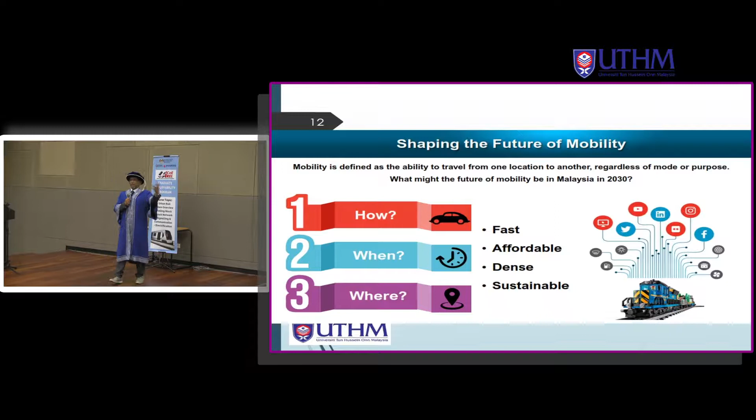When you travel, it's about the place from where we are to the destination where we want to be. What about time? Time is very precious. Back in the early days, time was not so precious, but nowadays it's getting more and more precious. You count by seconds, no more hours. Back in the 70s and 80s, if you watch a P. Ramlee movie, a one hour delay was normal. Now, no more.

In trains, we call it headway. Headway is when one train arrives, then it leaves, and then the other train arrives. So the time between the one that's leaving and the one that is coming, we call headway. Now, the common standard among urban rail systems is a headway of 90 seconds, which is 1.5 minutes - very fast. So if you miss a train, you don't have to worry much, because the next train will come in just a few minutes.

Okay, so you want it to be fast, in terms of time. You also want it to be affordable so that you can get the volume - as many people as possible to ride the train. We call it ridership.

Dense - not forgetting about comfort. We try to make MRT, mass rapid transit, so that hopefully in the years to come it will carry about 1,000 per trip - that's the mass. But right now it's not that many, because there isn't much service yet, and in terms of demography the stations are not that dense yet.

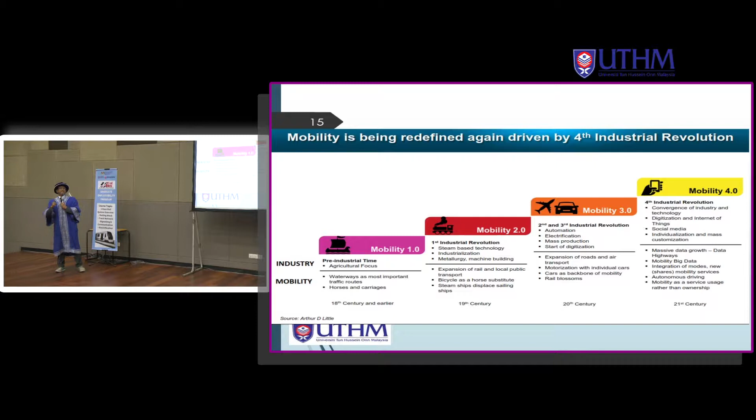What year was the first train in Malaysia, Tanah Melayu? What year was it? Anyone? Okay, I'll give you a clue: KTM celebrated 125 years - I think I have some KTM friends with me. The clue was KTM celebrated 125 years in the year 2010, so that means it began in 1885. Now that shows how old our railway industry is.

It began in 1885, but in Japan, okay, anyone? What year?

1873, just 12 years difference. And look where Japan is now in terms of railway. So we have to catch up, and this is the theme for this lecture. We need to be aware that we need to go fast, we need to be at par with the world global railway industry.

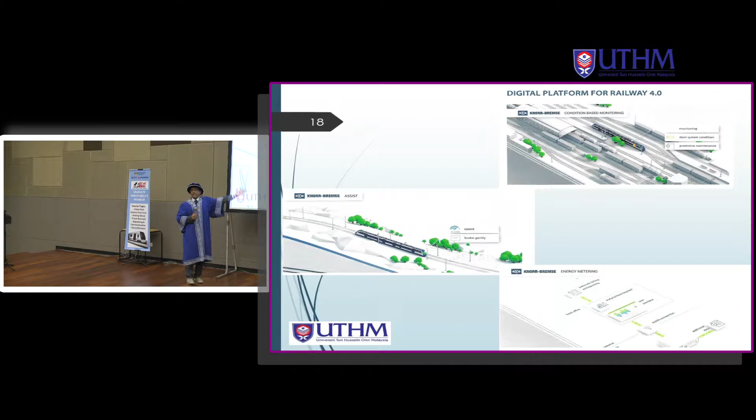Okay, these are some examples of digitization in railway in practice, and there are many, many companies in the world doing this. Number one, condition monitoring. We have sensors in many places, and those sensors give you data in real time, like speed control, brake systems, and so on. These are the platforms that make the train alive, organic.

Okay, next please. These are some of the smart operations I mentioned. In terms of operational efficiency, it optimizes the fleet's operational performance. When you talk about fleet, it's the train sets. So we manage those train sets to ensure the services are not interrupted.

So in Malaysia, in terms of operators, we have KTMB and Prasarana. Prasarana manages LRT, MRT, and monorail. KTMB manages the intercity, ETS, commuter services, and also some freight or cargo.

So this operational efficiency is about making those services work as efficient as possible. You know the best in terms of operation, no delay, which service in Malaysia? Name it. ERL, ETS, commuter, what? The best is ERL. The punctuality rate is almost 100%. And if you visit their depot, then only you know. And how do they manage? This is about operational efficiency, operator performance, and vehicle performance.

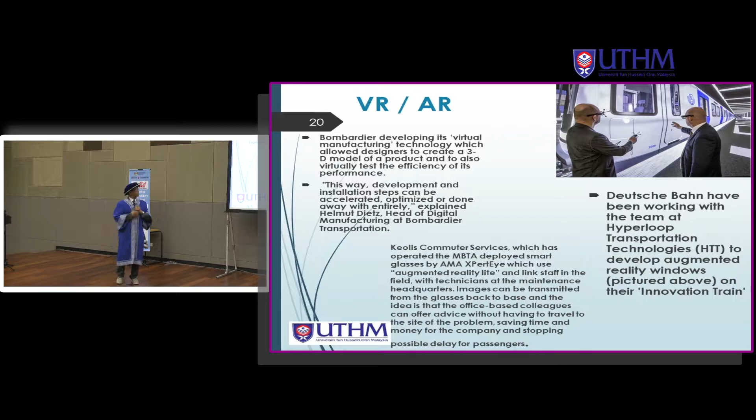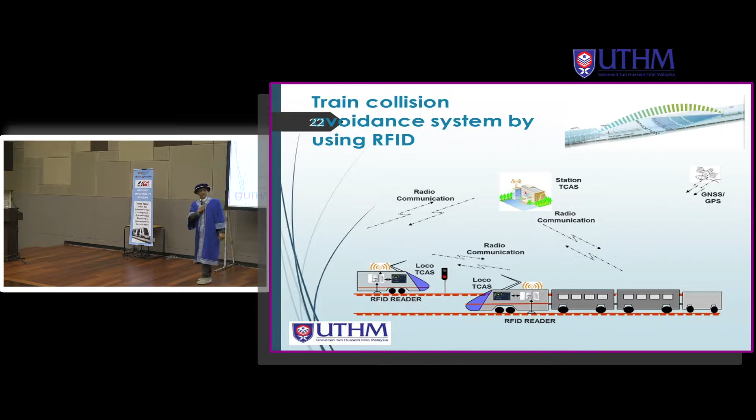Okay, the next topic is on energy. I'm going to have to rush a bit because there are a lot of things I want to discuss, but anyway this is about faster and greener. Historically, trains is considered dirty because of the soot, and because of the noise. So it spoils the environment, the shaking, the vibration. So all those are nuisance to the environment.

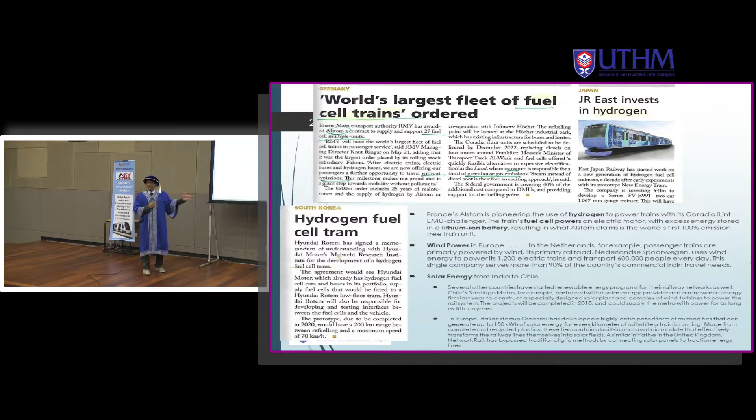Here are some clips about hydrogen fuel cells, wind power, solar energy, and so on. The wind power, you know, in Netherlands there are a lot of winds, so they are now using wind power for their LRT. The speed is enough for them to generate the energy. And some places where there are a lot of sun rays, so they use the solar.

Now what I'm going to show you is what the European railway were thinking back in 2012, 2013, and so on. This is where we need to look at them for us to plan the future. So you students here in railway, you have to bear in mind that you have to have this futuristic mind - what is the new technology that is already here, and what would be the next technology, so that when you go into the railway industry, you will be able to advise companies on what technology to really venture into.

Okay, next please. Play.

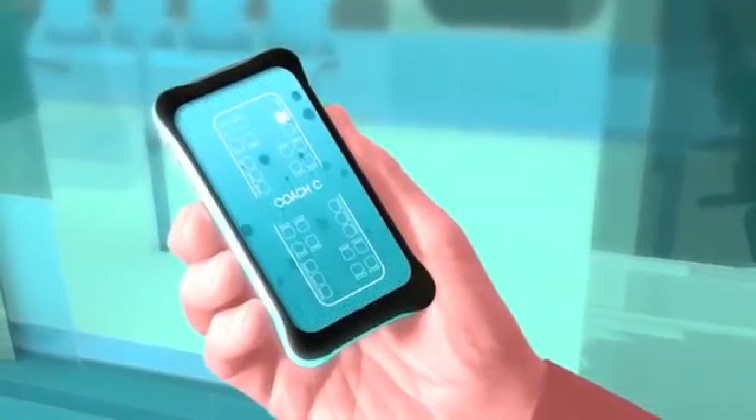Solutions developed in the Innovation Programme for cost-efficient high-capacity infrastructure will make European railways even more sustainable. Most of the network will be electrified, giving access to secure low-carbon energy. Trains using less power and causing less wear to the tracks will create an affordable and sustainable rail system. On the outer reaches of the network, energy storage systems will be used to power trains. These trains will reduce reliance on fossil fuels, charging intermittently at stations and overnight.

Technologies developed in the Freight Innovation Programme will see freight trains run smoothly through the network, providing EU industry with a reliable, efficient and competitive service. This is enabled by a control system that reconciles the different needs of passenger and freight trains by balancing demands on speed, capacity and energy. Freight trains travel unhindered at night because infrastructure maintenance is optimized. Improved rolling stock and infrastructure technology means significantly less vibration and noise, reducing the environmental impact of night running.

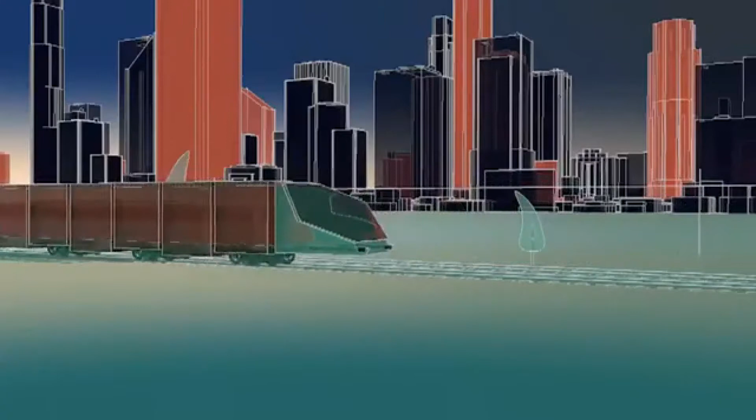Assets monitor themselves and each other. Sensors on trains send information on track condition back to data centers, leading to preventative maintenance.

To deliver this vision, we need to think about the railway as a complete system, and we need innovation throughout. With the dedicated long-term research and innovation support and investment of both the European Union and the rail industry, the technologies developed in Shift to Rail will meet customers' needs by delivering an affordable, safe and sustainable railway, which provides both high capacity and reliability, and which is accessible to all.

And with this joint undertaking, the rail industry can promote a culture of innovation, learn from other high-tech industries and roll out new technologies. The railway that emerges will be ready to cope with the demands of the 21st century and promote the worldwide competitiveness of EU industry in manufacturing and running the most sustainable transport mode.

How do you ensure you protect the environment? There are many factors, give me one. Low carbon.

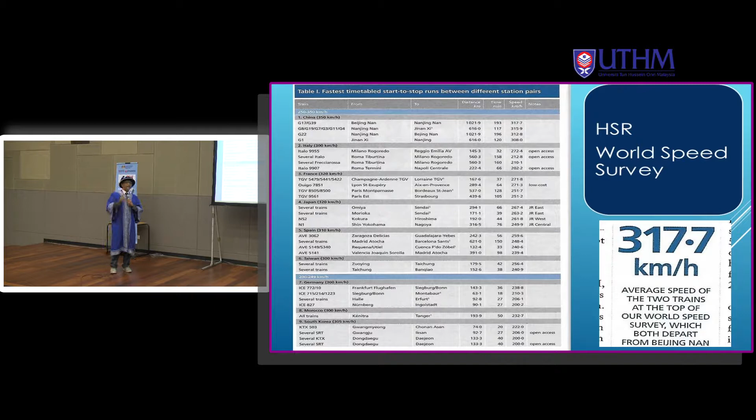So these are some of the figures about speed. Now, talking about kilometers is another thing. China, in 1990, had 0 high-speed line. Now, on average, this is the figure I got, from 1990 to 2015. The increment for high-speed rail, not normal rail, high-speed rail, per year on average for China is 2,200 kilometers per year increment. So that's why China is now the most populated country in terms of high-speed rail.

They imported the technology from Germany and elsewhere. After 10 years, they developed their own high-speed rail in terms of the rolling stock, the system, and so on and so forth. And in 2015, China had a factory making rolling stock in the United States of America, in Pennsylvania. So imagine how China has progressed.

Okay, now if you compare the speed there, this is average, not maximum speed. This is, if you look here, start to stop. What is start to stop? At the station, it starts and then the next stop - what would be the average speed? You can say from 0 to a certain speed and then 0 at the stop.

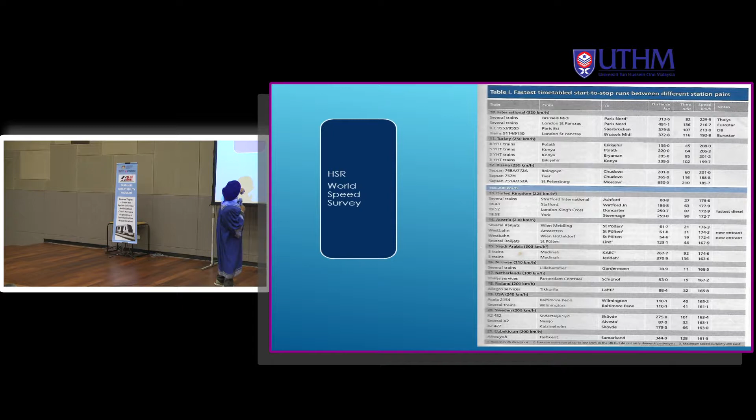Now, please go to the next slide. Now the next slide shows you, we continue the league. So you have Turkey, Russia, and below that is United Kingdom. So United Kingdom is not as fast as the other countries.

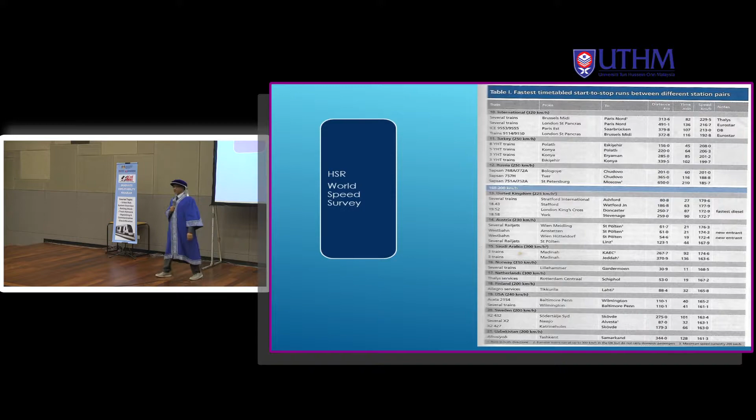So now that's why they are eagerly trying to have this high-speed rail in UK. Austria, Saudi Arabia, Norway, Netherlands, and so on and so forth, Uzbekistan, Malaysia, no way. So the highest speed for our nation is the ERL, 160 kilometers per hour, although it can go up to 180.

Okay, this is trains concerning the speed. Yes, please play.

Maximum speed of high-speed trains has been gradually increased in the past century, and the hunger for higher speed never stops as it's proven beneficial in improving people's productivity, lower carbon footprint, as well as smaller mortality rate compared to other modes of transportation. That's why maximum speed testing on new train prototypes is held occasionally. These are the 10 fastest train models in the world.

10th place, 300X. 300X, or Class 955, is the Shinkansen's trial model introduced in 1992. 6 total units were produced by 4 different vendors with little variation among them. In July 1996, Unit 6, the last unit, managed to clock 443 km per hour in test running, and became the Shinkansen's fastest train record, which still stands today.

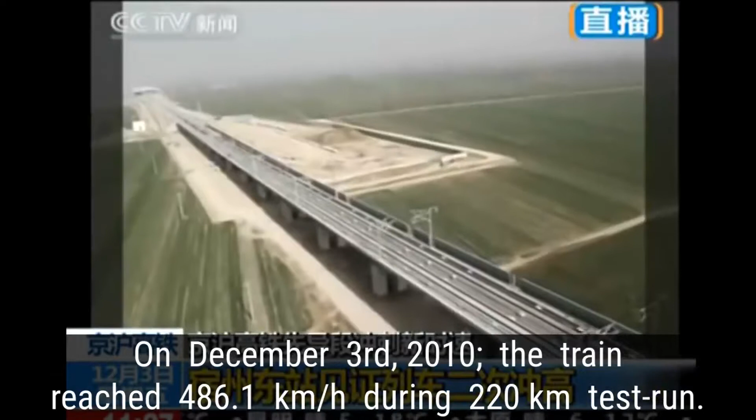7th place, CRH 380BL. Derived from Germany's Siemens Velaro, 100 units of CRH 380BL were built locally by China Northern Railways Company. During a subsequent test on January 10, 2011, these 16-car train sets broke China's own locomotive record with 487.3 km per hour - about 1.2 km per hour faster.

Sixth place, Transrapid SMT. The only commercial version of Transrapid train began its operation between Shanghai International Airport and Longyang Road Station with a travel distance of 30 kilometers. Albeit able to reach 501 kilometers per hour, the daily operating speed is capped at 431 kilometers per hour, which was already the fastest commercial speed during that time.

5th place, TGV Atlantic. TGV Atlantic is the second TGV model introduced by Alstom in 1989 for France's high-speed rail service. On a sunny day, 18th May, TGV Atlantic train set 325 cruised along the LGV Atlantic railway line at 515.3 km per hour. That was the fastest commercial train model on the planet.

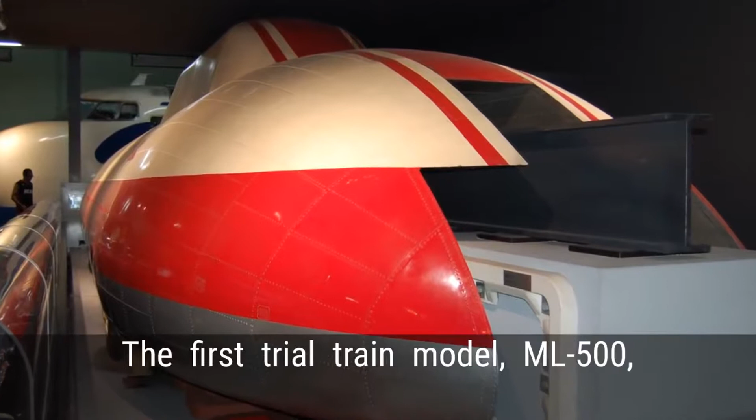4th place, ML500. Miyazaki Test Track was built at a length of 7 kilometers with monorail track upon opening in 1977, but changed to U-shape in late 1980. The first trial train model, ML500, was built specifically to become the first ever train to break the 500 km per hour speed mark.

3rd place, TGV Pos. A series of test runs called Operation V150 were conducted on the LGV East prior to its June 2007 opening, using a specially modified train. On April 3, 2007, a top speed of 574.8 km per hour was reached, making it the fastest wheeled train on the planet.

2nd place, MLX-01. Yamanashi Test Track is a 3rd generation track specifically for testing maglev trains at a length of 43 kilometers. Upon its completion, MLX-01 trains were introduced in 1997. From that day, continuous efforts were made by exercising serial test runs for years. In 2003, the train clocked 581 kilometers per hour, which was the fastest train ever during that time.

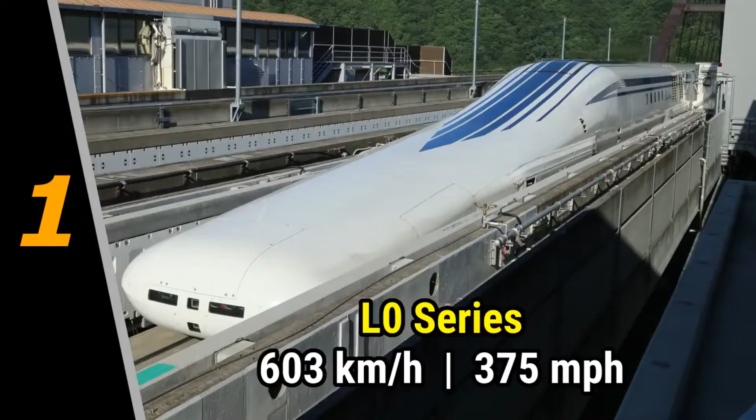1st place, L0 Series. When the MLX-01 service was terminated in 2011, JR Central, the body which governs Japan's research in maglev trains, introduced a new generation train model called the L0 series. The L0 series was shown to the public in November 2012. On April 21st, 2015, a 7-car train set a new land speed record for rail vehicles at 603 km per hour. It is the only rail vehicle to ever surpass the 600 speed mark.

Okay, this is about speed. Now people are comparing high speed. So what about us? Do we need high speed? Okay, so there was some, yes, yeah.

But it's a matter of investment being very, very big. So when you talk about this high-speed rail between KL and Singapore, the one that initiated the idea was thinking there is a high volume of travelers. The shuttle service, the plane from KL to Singapore, is huge. So if you provide an alternative, people will go for trains, just like in developed countries. They prefer to go if there is an alternative, and if it is slightly cheaper than the flight fare, they will go for trains. Because in trains, again, number one, it's about door-to-door time, and again, it is on the ground.

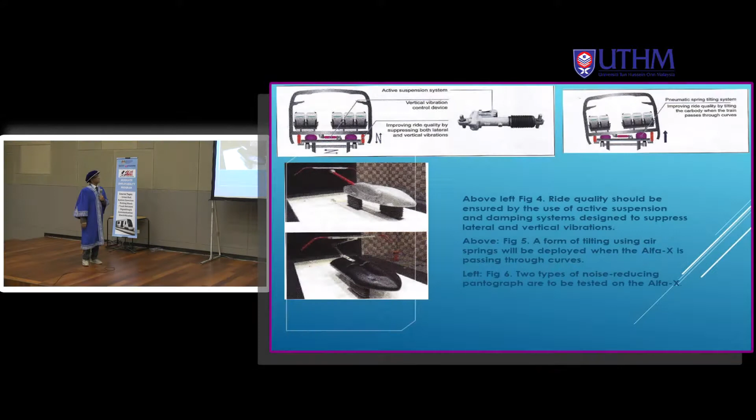But how do you ensure at that high speed you maintain all the criteria that you want? Safe, comfortable, and so on. So next please. So these are some of the technologies that have been developed while developing for higher speed.

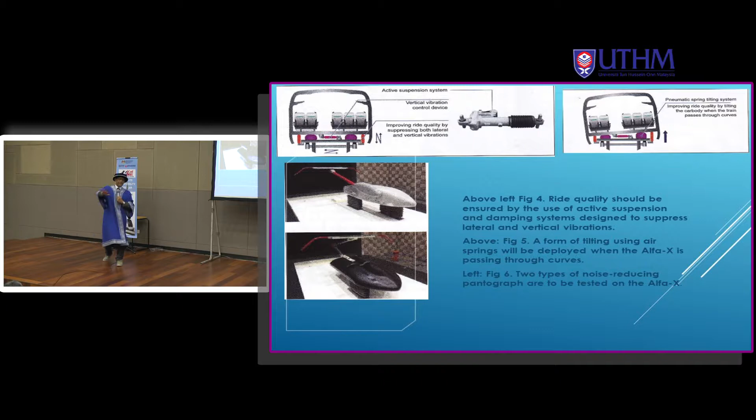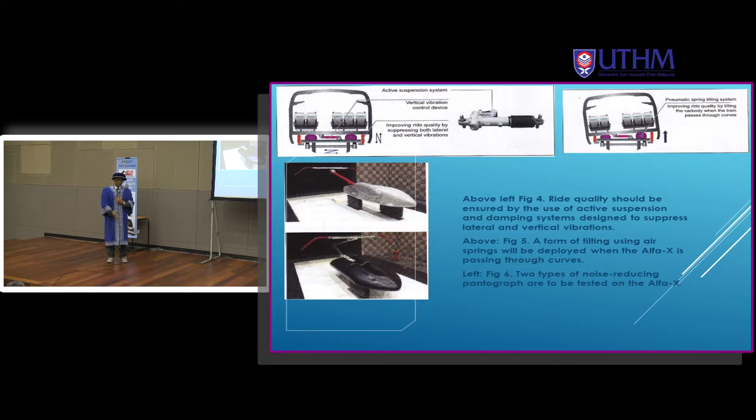So, let me give you some example here about the suspension system at a curve. This is a bit technical, but not so technical. On the road, if you travel, you call it cornering or bends, and you have this super elevation. In rail, we call it cant angle. Because in cars, it's okay since the 4 wheels are on the flat road. In rail, you have to maintain on the rail, and that's more difficult. From the civil structure side, you have to provide this cant angle.

For the mechanical side, you have this kind of tilting mechanism. Tilting is to compensate for that cant angle. For cornering, you need kind of super elevation. Similarly for rail, you have this kind of cant angle. But you have to remember, this is on steel wheel, so you have to provide those kinds of suspension. We call it active suspension. You have primary suspension and secondary suspension. Everything is controlled actively. So this is where active suspension becomes important.

So those are some of the things that are being developed and still being developed to reach for that speed. So speed is the motivation for the new technology that is developing. Okay, next please.

So this is again another one I want to show on top. Now on the top you have this kind of pantograph, catenary. This is again another innovation. It goes down and comes up when necessary, to reduce drag. This is about the tilting mechanism I mentioned. Okay, next please.

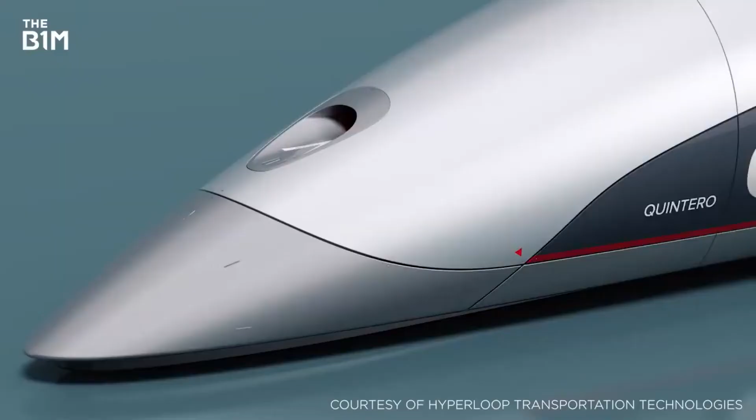Billed as the fastest way to cross the surface of the Earth, Hyperloop represents the greatest leap in transport infrastructure for generations. With passengers sitting in pods that travel at airline speed through low-pressure tubes, using electric propulsion and magnetic levitation, the concept promises to slash journey times between major cities from several hours to a matter of minutes. Whilst it may feel like science fiction, Hyperloop is now on the cusp of becoming a reality. This is the story behind the concept that's about to revolutionize our world.

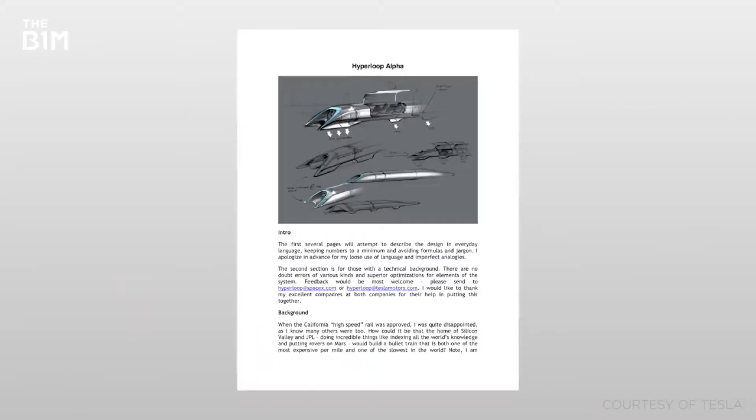Hyperloop was first conceived in 2012 by Tesla and SpaceX founder Elon Musk. In a white paper released the following year, Musk set out his vision for a futuristic, super high-speed transportation system that would see passenger pods move through a partial vacuum in steel tubes, addressing the two key factors that slow down conventional vehicles: friction and air resistance. Exploring a potential route between Los Angeles and San Francisco, Musk believed his concept could slash the 8-hour bus ride, 4-hour train journey, and convoluted 3-hour air travel experience between the two cities to just 30 minutes.

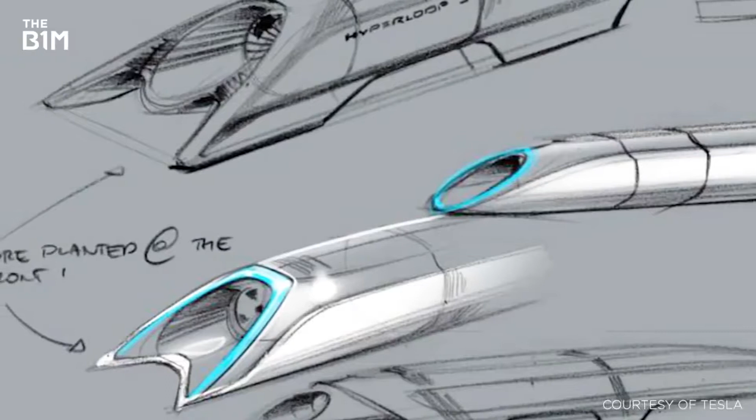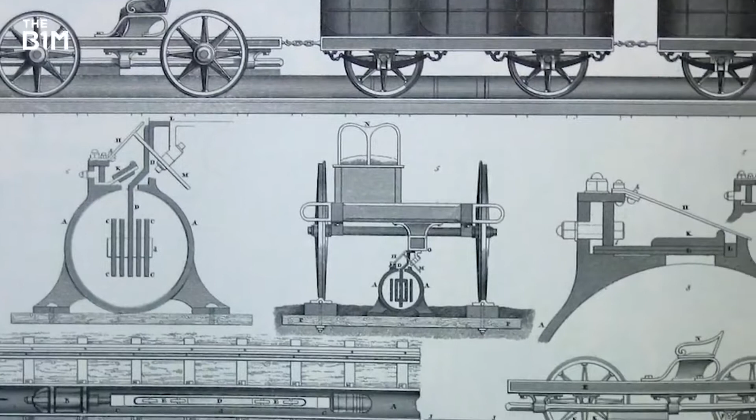Under Musk's first Hyperloop proposal, he suggested that compression fans would move air around the passenger pods to minimize drag and create air bearings beneath them, floating them off the surface of the tubes. It should be noted that Musk's early Hyperloop concept is not a million miles away from Isambard Kingdom Brunel's atmospheric railway that ran between Exeter and Newton Abbot in the UK from 1847 to 1848. That system moved carriages with air pressure. The air was extracted from a pipe that ran between the rails by pumping stations situated roughly every 3 miles along the route, creating a vacuum. A piston contained within this pipe was connected to the train, which pulled it forward. Despite its initial success, the leather flaps that made the vacuum pipes airtight soon began to fail, causing air to leak from the system, and Brunel's railway was abandoned.

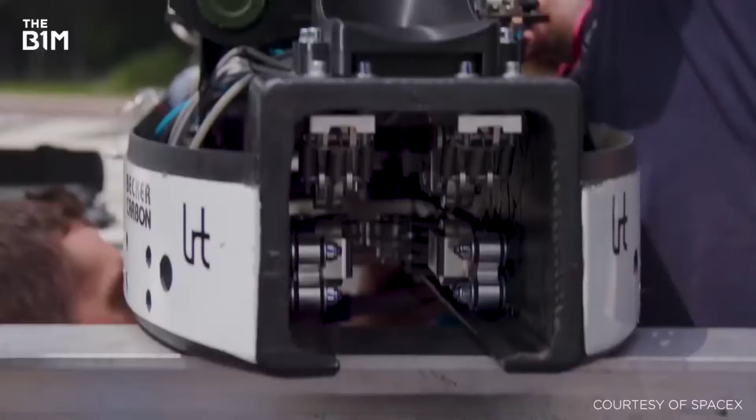With an estimated price tag close to $6 billion, Musk's first Hyperloop concept never came to fruition. But the impressive idea and potential to link cities in such a direct way sparked intense interest. From inception, Musk had always stated that the concept of Hyperloop would be open source, and he actively encouraged others to come together and develop the necessary technology independently from his involvement. This led to the formation of several startups and student teams developing various aspects of Hyperloop technology with varying degrees of success. Now, several fully fledged companies are making significant strides to bring Hyperloop systems into reality.

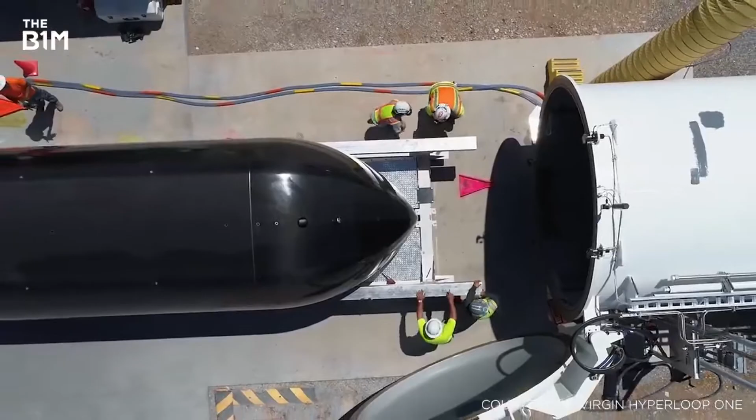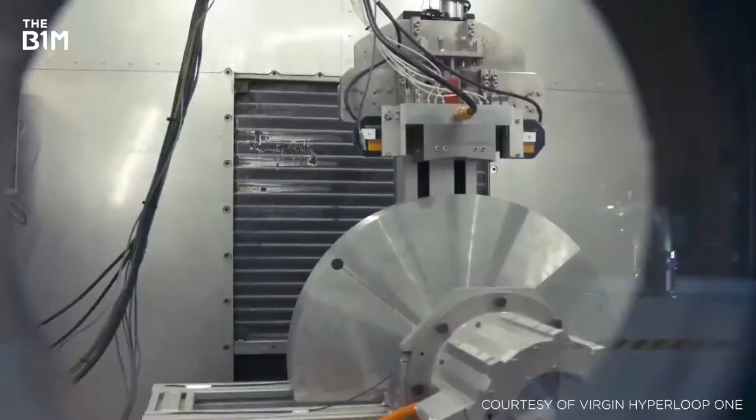Hyperloop Transportation Technologies, or HTT, are making aggressive advancements and recently constructed a full-scale test track in France. But the clear leaders of the pack in the current standings are Virgin Hyperloop One, who are on track to achieve their bold ambition of bringing a Hyperloop system into operation by 2021. Originally formed in 2014 as Hyperloop One, the company was rebranded following a significant investment from Sir Richard Branson in 2017.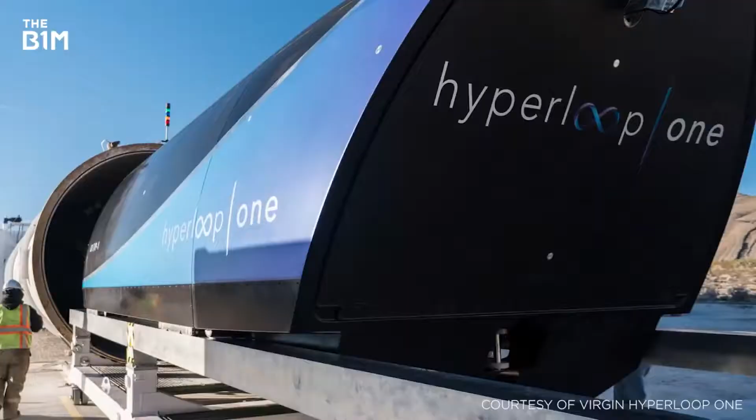Deviating slightly from Musk's original plan, Virgin Hyperloop One's technology combines two basic principles. The first is magnetic levitation, or maglev, a technology already used in monorails to lift the passenger pods and move them along their rails. Magnetic levitation uses two sets of magnets, one to repel the train from the track and lift it upwards, and the other to move the floating train along the track at considerable speed with reduced friction. The second principle is the use of a low-pressure, vacuum-sealed environment for the passenger pods to travel through. By removing most of the air from the tubes and having no contact with the ground, the pods face little to no resistance as they move. Air pressures inside the tube are equivalent to flying 200,000 feet above sea level.

Such an environment enables the pods to reach speeds of over 670 miles per hour using very little energy. By virtue of being in a tube, the system is protected from the weather and can operate in almost any climatic conditions. Virgin Hyperloop One's system is controlled by advanced software that ensures acceleration and deceleration occur gradually, going relatively unnoticed by those travelling inside.

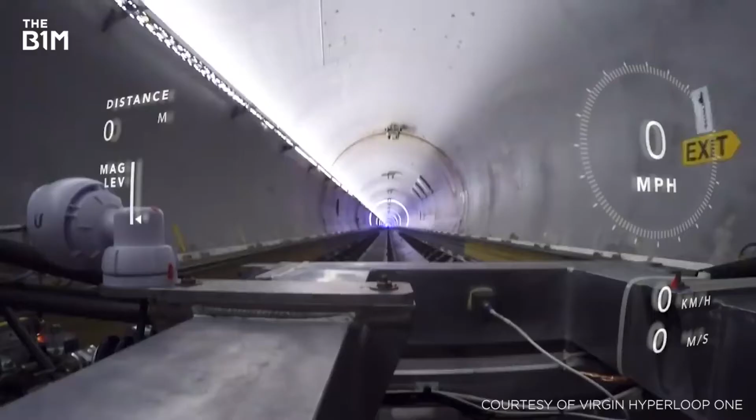Having built a 500-metre track in the Nevada desert, Virgin Hyperloop One have carried out several tests, focusing on individual aspects of the system, and a complete full-scale systems test in May 2017. The propulsion, braking, levitation and vacuum systems are all performing well, and the team have achieved a top speed of over 240 miles per hour to date.

To inform their plans for developing a fully operational network that is affordable for all, Virgin Hyperloop One launched a global challenge to find the routes best placed to benefit from Hyperloop technology. With over 2,600 entries, the field was reduced to just 35 potential locations, with each entry enjoying strong support from governments and urban planners.

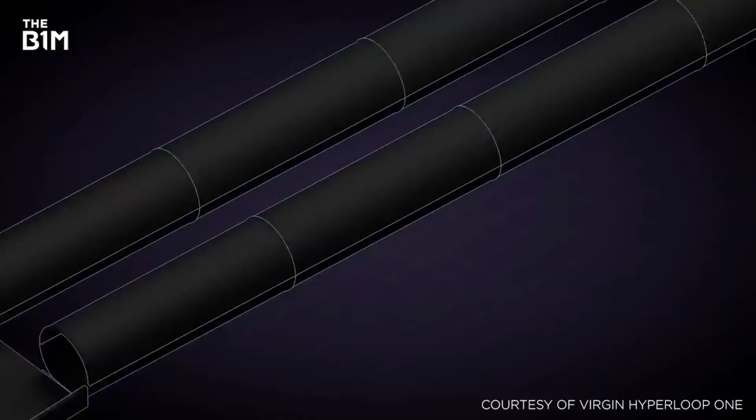With 10 winners across 5 countries, Virgin Hyperloop One are now working in partnership with each of the locations on how best to deliver the Hyperloop technologies in live networks. In February 2018, the firm unveiled their first prototype passenger pods for the Dubai to Abu Dhabi route, a network that would drastically slash the car travel time between the two cities from 2 hours to just 12 minutes.

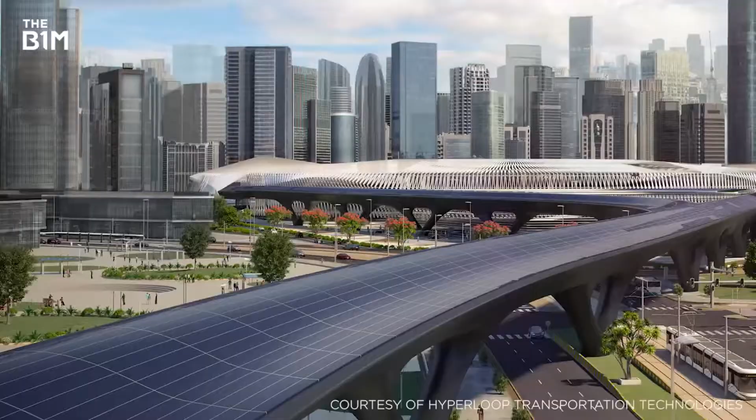The advantages of Hyperloop are considerable. Like train stations, Hyperloop stations called portals are planned to be located within inner city areas with easy links to existing transport infrastructure. This gives Hyperloop systems a distinct advantage over air travel, where airports tend to be located beyond city limits with fewer accessibility options.

Additionally, the system is being developed to function on a turn-up-and-go principle, without a lengthy check-in process, and with accelerated, advanced security checks. Another clear benefit is its speed.

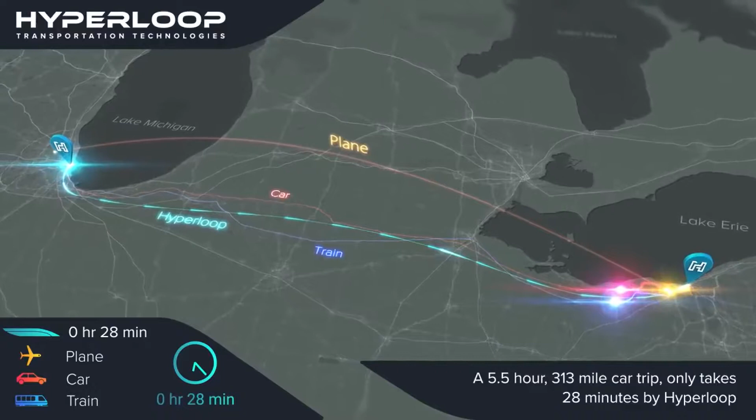If Hyperloop could significantly reduce the travel time between cities, it could be possible to live in a completely different city or a part of the country from where you work, with a commute no dissimilar in length to the one you perhaps take today.

This opens up a wide range of housing and employment opportunities, with people no longer having to live close to where they work. It could also take pressure off our cities, where infrastructure is often still catching up with development, and where house prices have become unattainable for most.

With speeds rivaling aircraft, and 9 of the top 10 busiest air routes in the world being domestic, Hyperloop has the potential to completely revolutionise the way we live, work and travel.

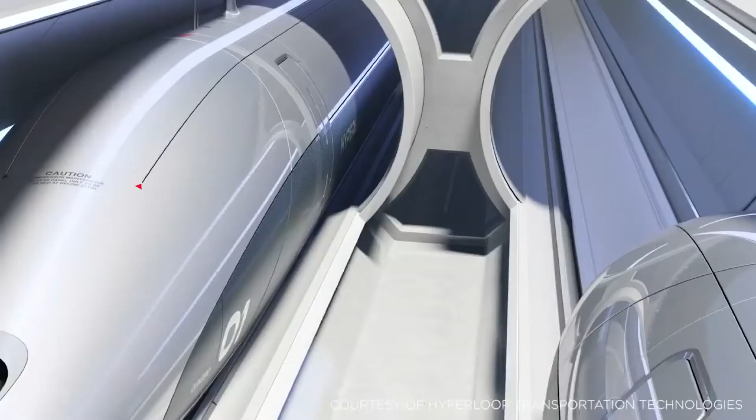A Hyperloop system requires very little energy to propel pods through its tubes, as the vacuum environment poses little resistance. As such, the systems could be powered by renewable technologies such as solar and wind, offering a considerably cleaner alternative to air travel.

When you consider the prospect of people being propelled in tubes across the Earth's surface at near supersonic speeds, there are a number of questions that instinctively jump to mind. Perhaps the first is the impact of a potential break or breach in one of the tubes, possibly as the result of an earthquake or external impact.

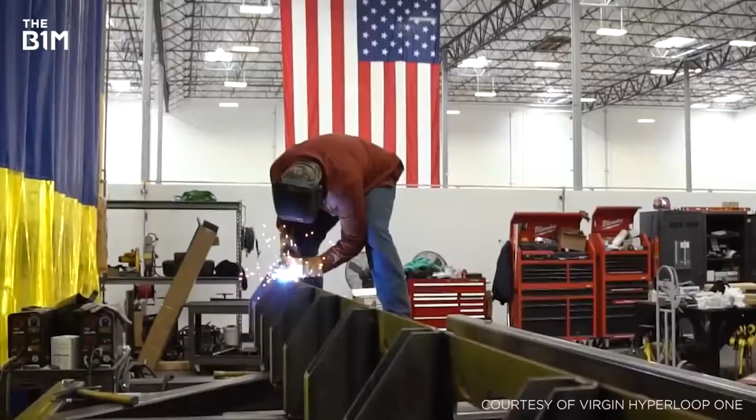Virgin Hyperloop One explained that they have addressed this by constructing thick steel tubes that are extremely difficult to puncture or break. Additionally, the tubes are engineered to withstand changes in pressure and air leaks while maintaining their structural integrity.

Theoretically, a sudden influx of air into one of the tubes would simply slow the pods down due to the increased air resistance. The pods could then be directed to the next portal via an auxiliary power boost.

There is also the ability to section off parts of the route and to repressurize sections where significant emergencies occur, and all pods are expected to be fitted with emergency exits.

Externally, Hyperloop systems will largely travel on elevated, seismically designed pylons that are able to move and flex independently of one another, minimizing damage in the event of a major ground shift. Sensors along the route would instantly report issues to the system's control center.

In answering the natural safety concerns raised, Virgin Hyperloop One also point out that millions of people already travel at high speeds in metal tubes every time they take a flight, and that numerous concerns surrounded the use of jet aircraft when that mode of transportation first came to prevalence.

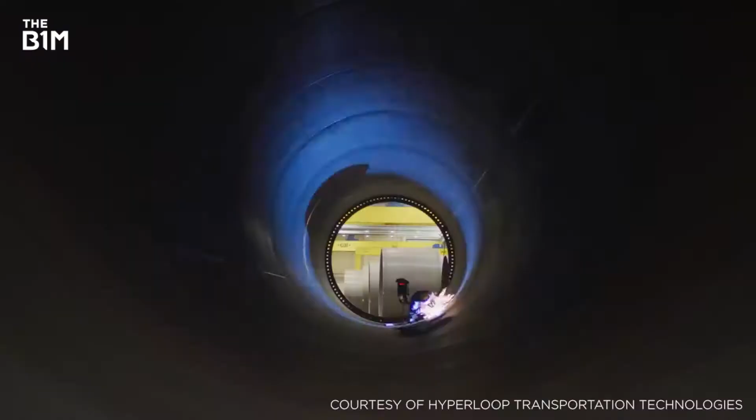While the idea of Hyperloop may seem far-fetched, when you consider the industrial progress made in the past 200 years, the current rate of technology adoption in our societies, and the significant advances being made by Hyperloop companies around the world, this incredible new transportation system looks set to become part of our everyday lives in the very near future.

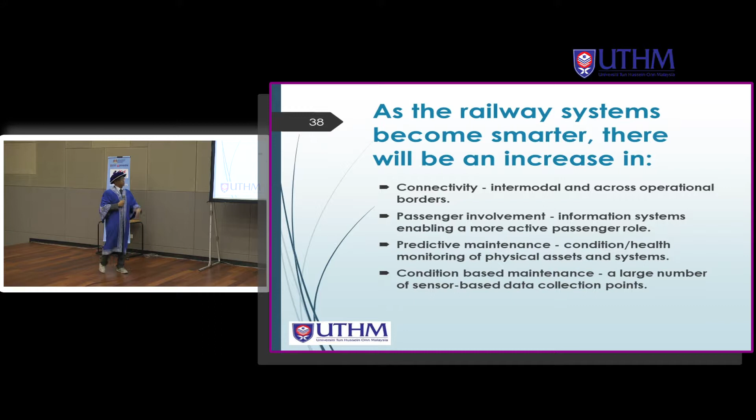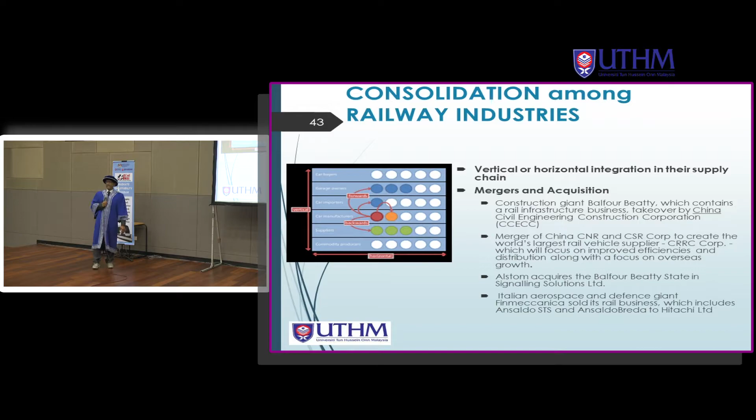In terms of railway, you have component makers, you have system integrators, and on top of that the operators. So how do you manage all the different companies and industries at different levels? This is where consolidation comes in - consolidation is synergy, working together, no more working in silos. Data sharing, and money-wise, you have to consolidate.

Next please. So what about Malaysia? We have here KTMB, Perdana, we have Techmark, we have a few from the industries. Thank you very much for coming, I appreciate that very much.

And the rail industry in Malaysia, where are we now? Next please.

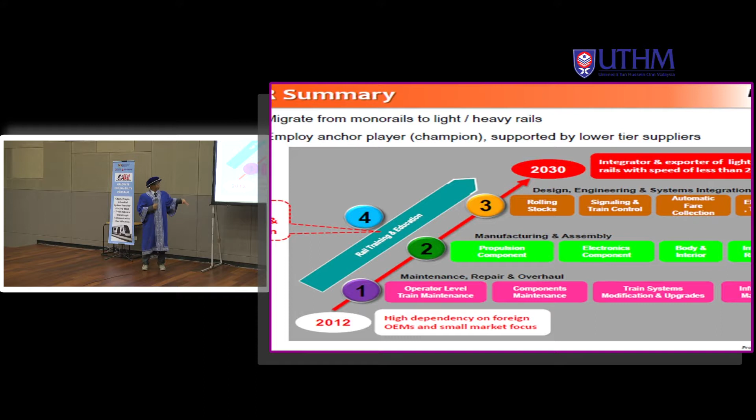We very much depend on foreign OEMs and have a very small market focus - this is about consolidation. At the next level, I think we are quite strong in terms of MRO - maintenance, repair, and overhaul, we can do it. Albeit new technology comes in, we still worry about knowledge transfer, but those issues are now being tackled. After that is manufacturing and assembly - we have Scomi Engineering which manufactures train sets. Malaysia boleh - SCOMI is one example.

At the top level is design, engineering, and system integration - this is where we are quite lacking. So you students need to go to the upper level now, okay? Not enough for MRO, not enough for manufacturing and assembly - you have to go up for design, engineering, and system integrators. We now rely very much on foreign experts.

By 2030, we envisage being an integrator and exporter of light rails with speed less than - again this is where we follow suit from China. China in 1990 was at zero. By 2015, they have a factory in the US, not in Malaysia, in the US. How did they do it? Next please.

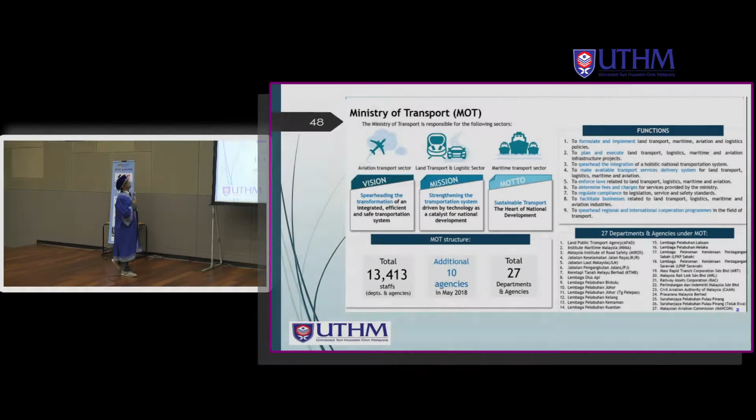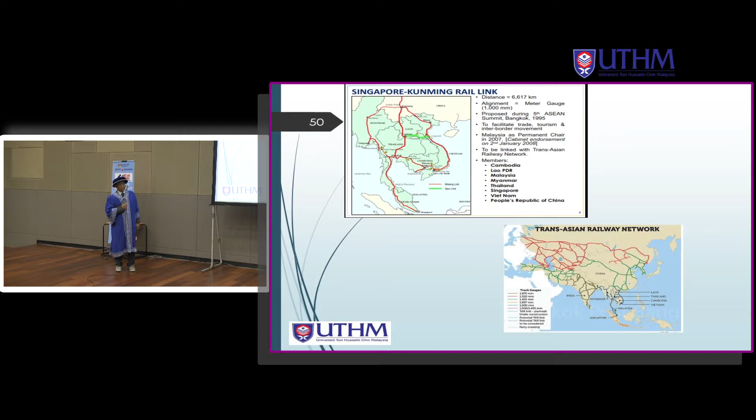Okay, I'm going to just talk a bit about Malaysia, where we stand. So the project about the Singapore-Kunming rail link - Malaysia is a very, very important place. Geographically, demographically, we are very, very important. So this is about Trans-Asia, the Trans-Asia Railway Network, which is going to happen.

So the capital of Indonesia will move to Kalimantan Timur, somewhere there. So again, new rails are coming up.

So this is the project of plenty. You guys don't worry, okay? In Malaysia, there will be a lot of work, and in future, there will be also a lot of work in the ASEAN region, not to mention Middle East.

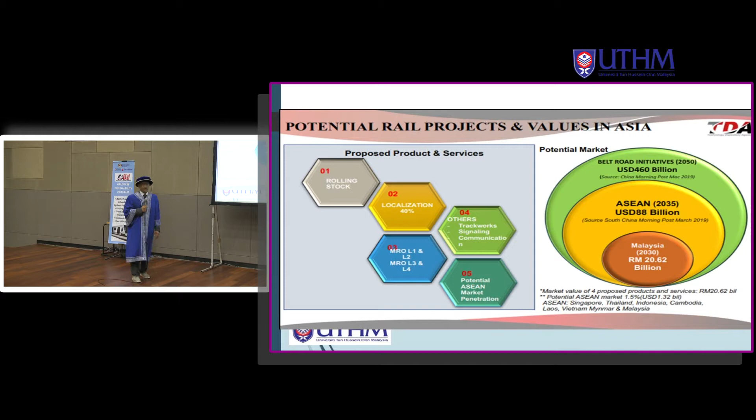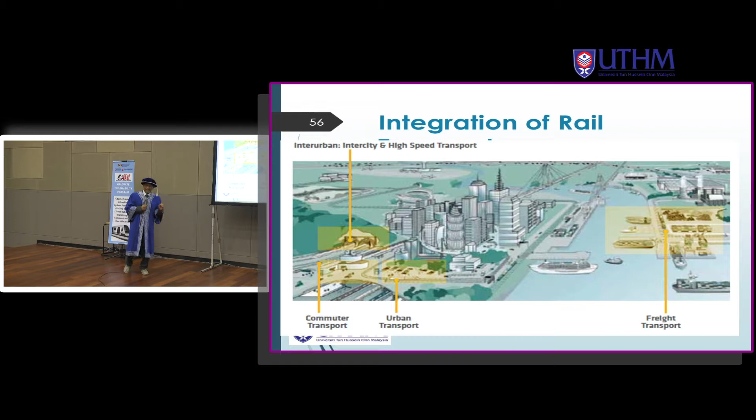So next, high speed. This is about the integration of rail, just like we have some simple, small case - TBS, Terminal Bersepadu Selatan. So this is a big one. We are going to have this Bandar Malaysia. You know what Bandar Malaysia is? The old Sungai Besi Airport is going to be Bandar Malaysia. So it's going to be the big hub for transportation.

So these are some of the current issues and challenges. Due to time shortage, I'm not going to discuss this, but you have this in your e-book.

So these are some of the drivers of change in Malaysia, because I am part of that Future Rail 2030, so we discuss this - in terms of policy, in terms of technology, and human capital development. So this is where ICoRail comes in - Industrial Center of Excellence of Railway in Malaysia, in Pagoh, where I am the head. So this is the technology and human capital development. So this is UTHM's role.

So again, there will be multimodal, market, connectivity and tourism. Some issues there.

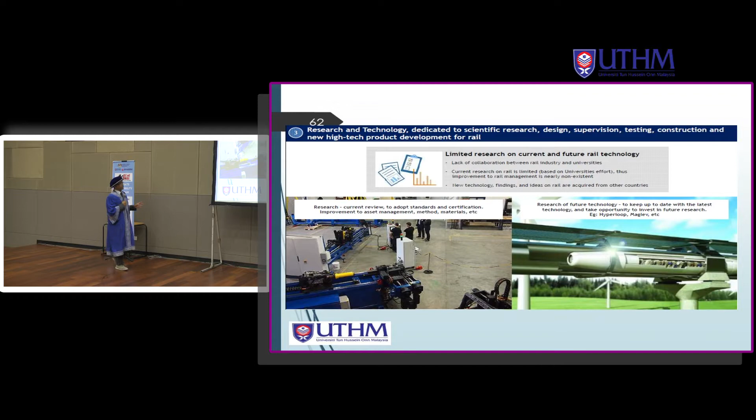Okay, these are some of the research in Malaysia that is going to be conducted. Some of it is being conducted now, and some of it is going to be conducted in the near future, in terms of maglev technology and so on and so forth.

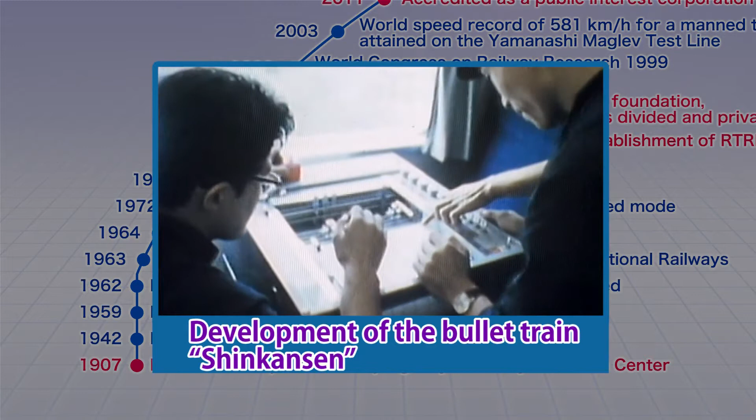Railway Technical Research Institute has been continuing to engage in the research and development of railway technology for over a century, since its establishment in 1907. Since the institute was moved to its current location in the Kunitachi area of West Tokyo in 1959, RTRI has played a central role in the research and development of the Shinkansen, the world's first high-speed train, as well as maglev, the magnetically levitated transport system.

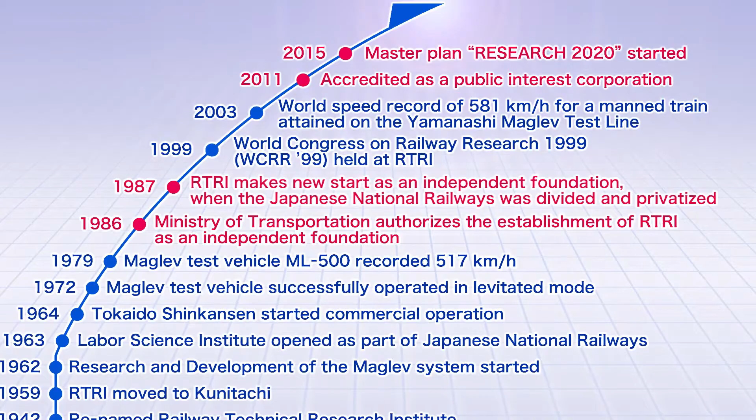In 1987, the Japanese National Railways was privatized and divided into several companies, and RTRI became an independent organization, although maintaining close ties with the railway companies resulting from the division. In 2015, a vision for RTRI called Rising was formed, aiming to develop innovative technologies to enhance the rail mode so that railways can contribute to the creation of a happier society.

This vision focuses on 3 missions: 1. Intensifying R&D activities. 2. Fulfilling our tasks using the best science available in an ethical way as an independent and impartial research body. And 3. Becoming a leader of the world in the field of railway technologies.

In R&D, the Institute aims to address challenges that demand innovation, promote research in fields where RTRI has significant advantages, explore research frontiers, advance interdisciplinary research projects, and advance fundamental research.

Based on the future vision of RTRI, execution of the master plan called Research 2020 was started in 2015.

RTRI covers a wide range of research fields such as vehicle technology, civil engineering, electrical engineering, information and communications technology, material science, environmental engineering, and human science. RTRI specialists of each field are cooperating with each other while maintaining their uniqueness, working on R&D for the future of railways, development of practical technologies, and basic research for railways. The main R&D objectives of RTRI are improvement of safety, cost reduction, harmony with environment, and improvement of convenience. Now, the R&D activities of RTRI will be introduced along these 4 objectives.

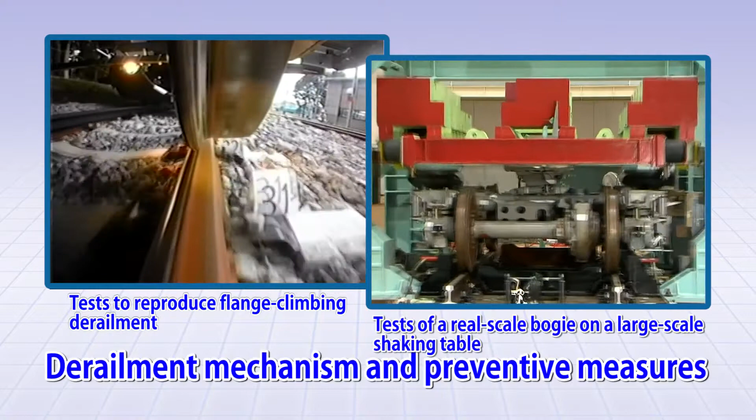Entrusted with passengers, the most important responsibility of railway operators is maintaining and improving safety. RTRI has been promoting a broad range of research projects to improve safety, such as the analysis of derailment mechanisms and development of preventive measures, the evaluation of safety and development of prevention technologies against natural disasters such as earthquakes, tsunami and crosswinds, and the evaluation of passenger safety and passenger behavior in the event of an accident.

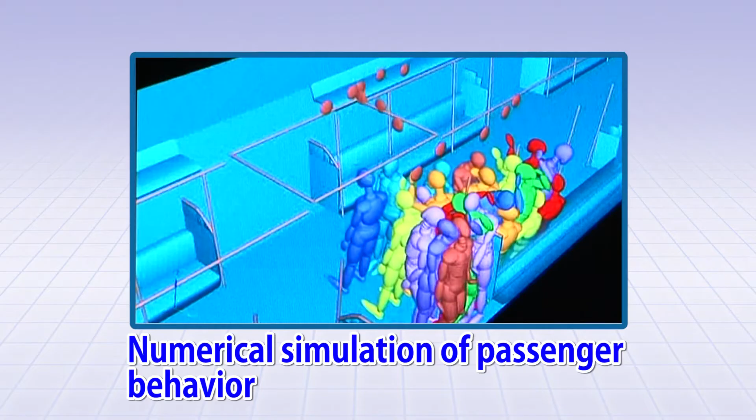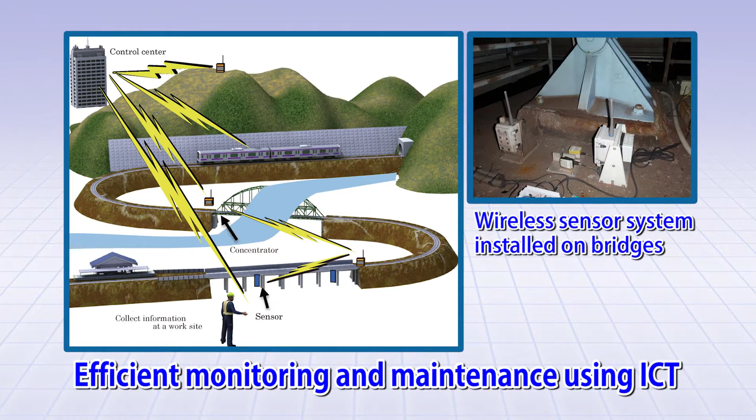In managing large infrastructure, it is important for railway operators to reduce costs in various fields such as construction, manufacturing, inspection and maintenance. RTRI is working on projects to reduce cost while ensuring safety, such as the development of monitoring systems using information and communications technology (ICT), improvement of maintenance efficiency, infrastructure diagnosis using image processing technology, technology to reduce maintenance costs of ground facilities, and disaster-resistant structures.

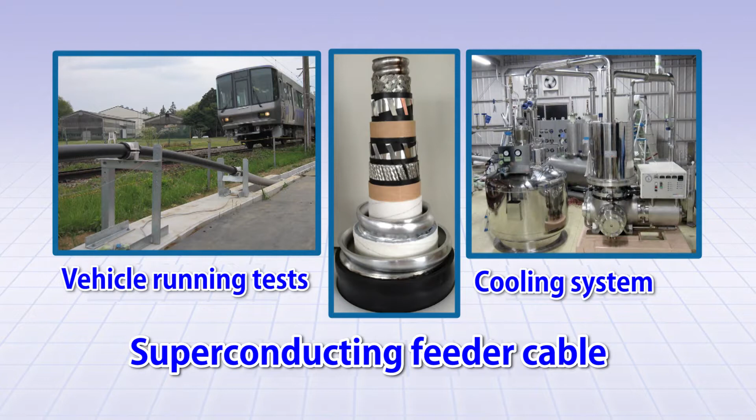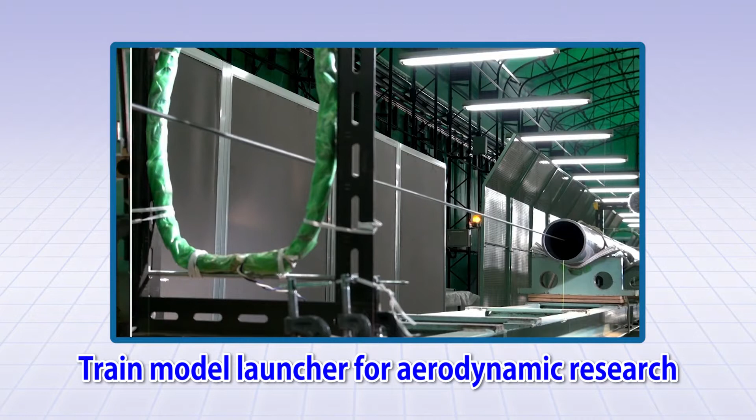Railways are an environmentally friendly transport mode. RTRI is promoting energy conservation utilizing superconductors cultivated from the development of maglev vehicles, technology for clean energy, and the development of fuel cell railway vehicles that run on hydrogen. The Institute is working on innovative research and development aiming for environmentally compatible railway systems, such as in the analysis of and countermeasures for trackside noise and vibration phenomena.

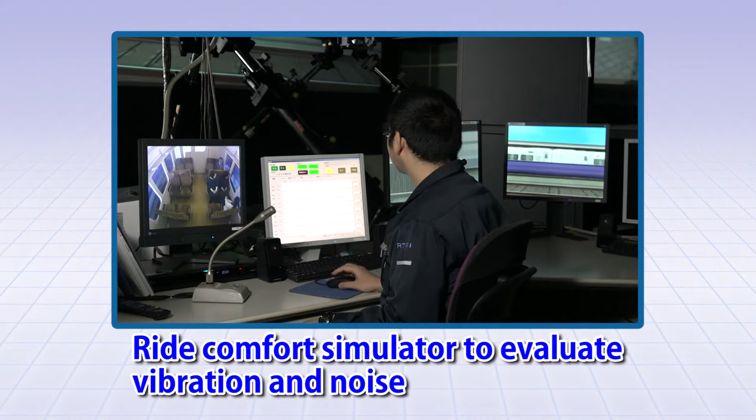RTRI is aiming to achieve more comfortable and convenient rail travel. For example, the Institute is conducting R&D on measures to enhance convenience in stations by simulations and experiments of passenger flow, evaluating ride comfort by simulating vehicle vibration and noise perceived by passengers, and developing damper systems to reduce vertical vehicle vibrations, all in order to achieve more comfortable and convenient rail travel.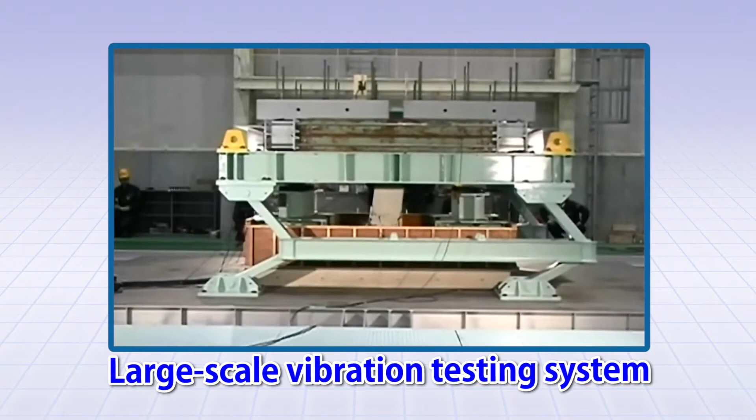Many testing facilities support the R&D activities at RTRI. Our institute headquarters in the Kunitachi area in West Tokyo has a 700-meter-long railway test line, a test stand capable of reproducing train running conditions up to a maximum speed of 500 kilometers per hour, a large-scale vibration testing system that can simulate ground vibrations of large-scale earthquakes on the order of 1 or 2 G, and various other testing facilities.

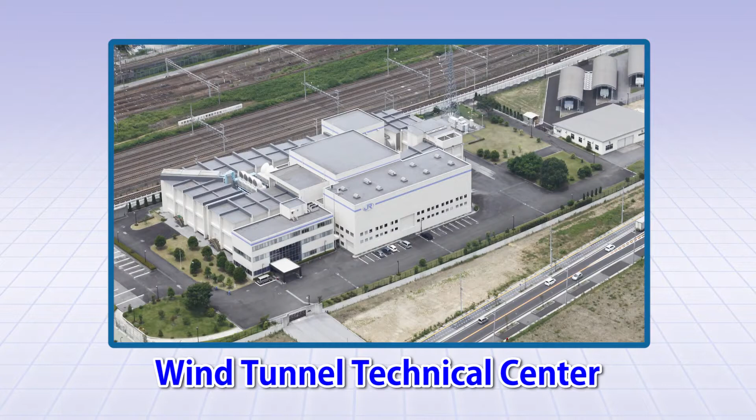RTRI also has testing facilities in other parts of Japan. RTRI's large-scale low-noise wind tunnel in Maibara utilizes the world's top-class low-noise performance to evaluate aerodynamic noise of railway vehicles, and other facilities conduct R&D making use of the natural environment to examine damage due to salt and snow.

As an independent third-party organization, RTRI offers its expertise to activities such as investigations to examine causes of accidents and disasters and propose countermeasures, technical support and drafting of national technical standards. The Railway Technology Promotion Center at the Kunitachi headquarters of RTRI provides a forum where railway engineers and researchers can compare notes and cooperate with each other.

The activities of RTRI are not limited to Japan and involve active communication of R&D information in collaborative research projects with overseas railway companies, research organizations, and universities. The Railway International Standards Center was established in 2010 to play a central role in reviewing international railway standards, coordinating with related Japanese and overseas organizations to spread railway technology of Japan throughout the world. And in 2019, RTRI will host the 12th World Congress on Railway Research, WCRR 2019 in Tokyo. This Congress will be a major opportunity for railway-related delegates from around the world to gather to exchange ideas and promote further research and development of railway technology.

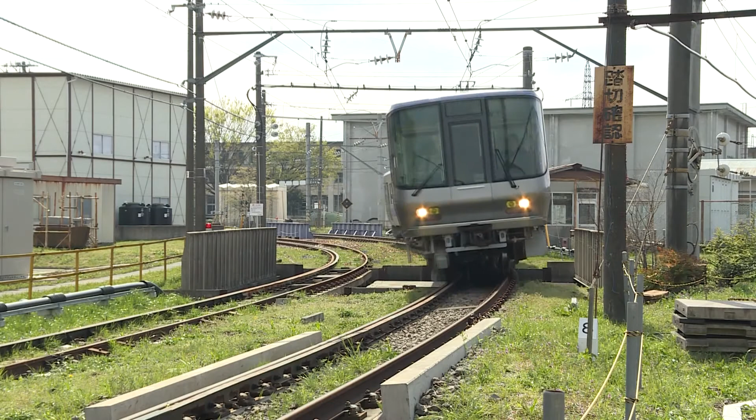The railways are continuing to expand throughout the world as vital and indispensable infrastructure. By engaging in dynamic R&D activities and developing innovative technologies, the Railway Technical Research Institute will continue to contribute to the development of railways and the realization of a more prosperous society.

UTHM can be there in the not so far future, inshallah.

So this is some of the technology development in rail in various countries, which I share from our Future Rail 2030 documents, with MIGHT and also with the Technology Depository Agency, and countries like Japan, Australia, and so on. So they have their own focus.

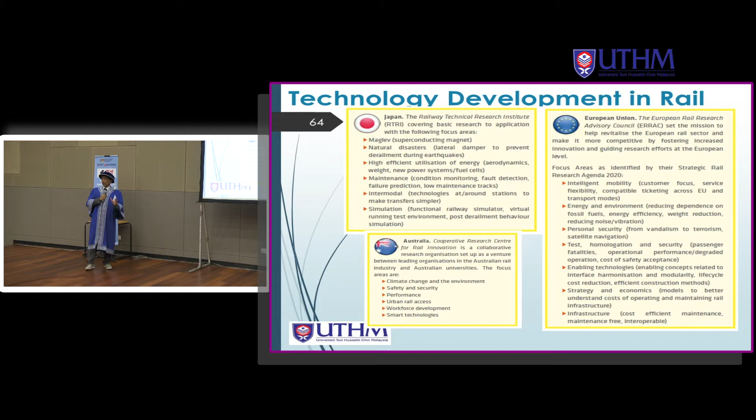United States, India, by the way, is quite advanced. It's quite advanced.